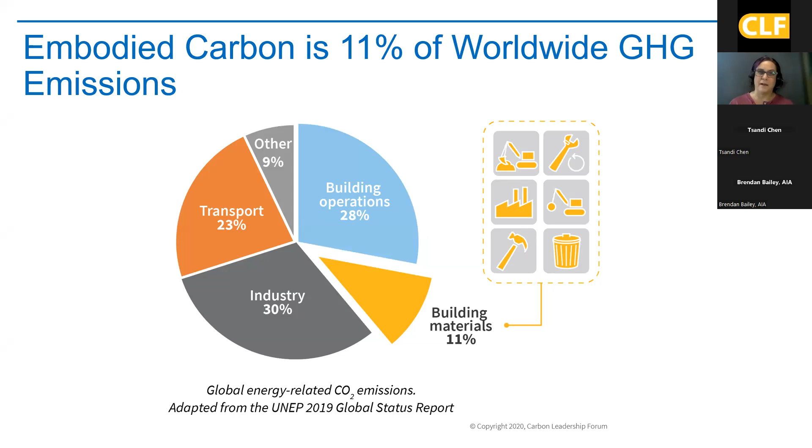For those not familiar with embodied carbon - but being part of the Carbon Leadership Forum in Los Angeles, I imagine you are. This is an important aspect: when we look at the 39% of GHG emissions associated with buildings, 11% of that is associated with embodied carbon. I hope y'all have heard of that before; this isn't the first time you're hearing it.

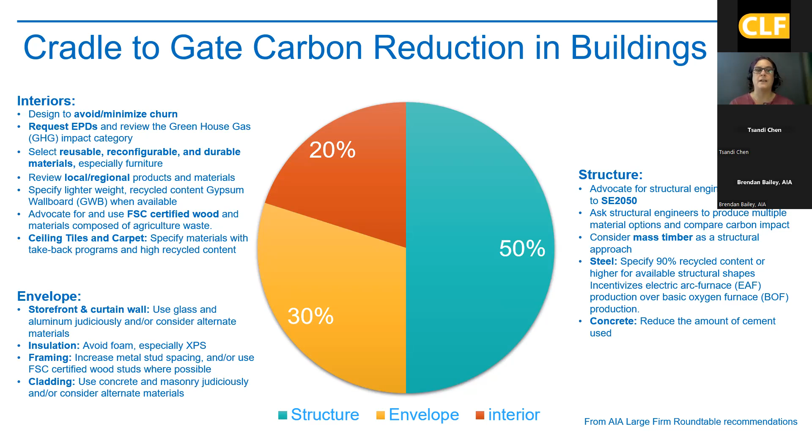Likewise, when we look at the cradle to gate embodied carbon of a building, the majority is associated with the structure. This is a chart from the AIA Large Firm Roundtable breaking down three major components. I like to show this graph because, yes, this is the upfront embodied carbon, but as we look at the life cycle, that 20% for interiors starts to grow over the life of the building. If you're familiar with the book How Buildings Learn, that's the aspect where those products change way more frequently than the envelope or the structure.

As I mentioned, NBI has been working within different policies to advance embodied carbon. We've been working at the state level, building codes, local codes, and utility incentives. Within each of these there are different levers that can be pulled. You've seen Buy Clean procurement policies, different incentives jurisdictions can provide, green building rating systems within the building codes, and REACH codes, stretch codes, and green codes that can incorporate embodied carbon requirements.

There are a lot of different municipal codes - you've heard of Marin County's concrete code, which is a county code. Zoning codes, like what's happening in BC, are also really important. And as utilities start to look not just at kWh and therm savings but at GHG emissions, we're going to see more utility programs finding different ways to address embodied carbon.

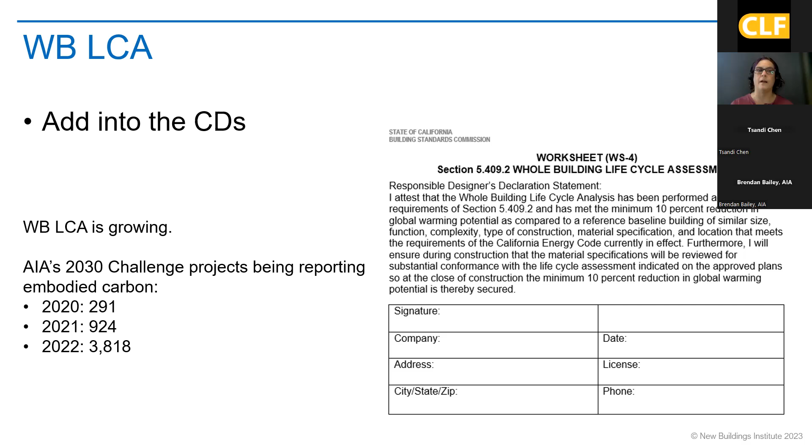The numbers on the far left are AIA's 2030 Challenge and how many projects have been reporting embodied carbon — the growth year over year is pretty drastic. Projects over 100,000 square feet are more likely the firms reporting to the 2030 Challenge, so we're anticipating most of those projects will choose this path. And this will start to get into the worksheets here.

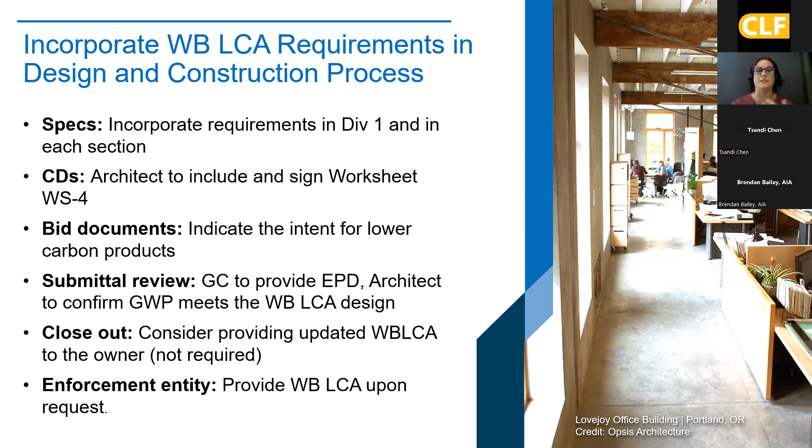There is documentation set up to support that process. We've started thinking through ways to incorporate different components into your requirements, because really only the reporting form is needed. But it's important to put the requirements within the specifications, the CDs, the bid documents, review things through the submittal review process, and understand what was included or not included at closeout. We have some of these in here as recommendations, and we'll continue to build on this through important conversations like this.

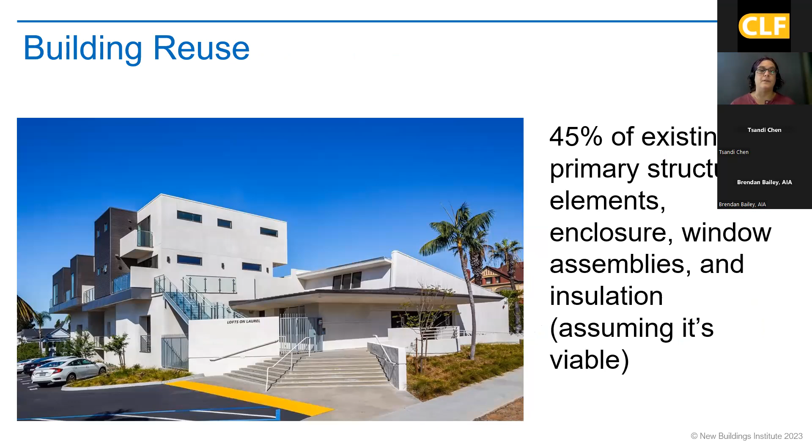For building reuse, 45% of the existing primary structural elements, enclosure, window assemblies, and insulation — assuming all of that is viable — can be counted towards that 45%.

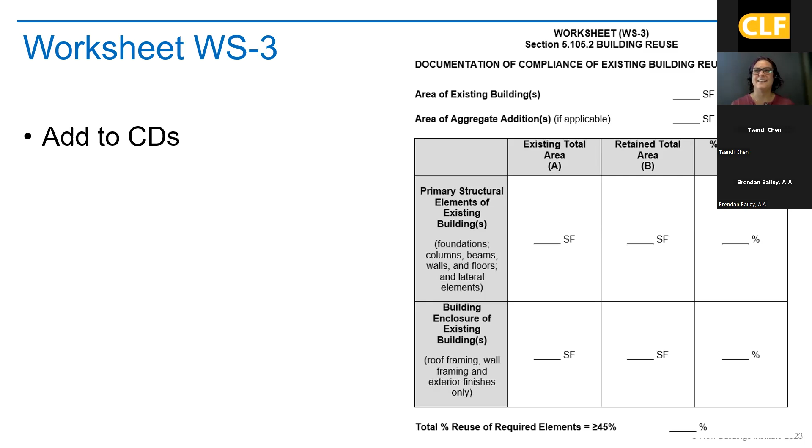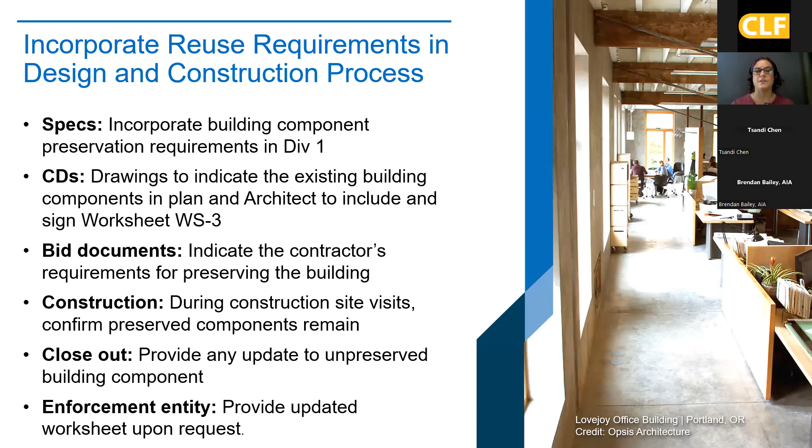If you've worked with CalGreen, you know they love worksheets, and you have to put those in your CDs. This is just the template of what that looks like, with different ways to incorporate it within specifications, drawings, bid documents, how to verify during construction, closeout, and really the state's enforcement is that worksheet.

The prescriptive path, as I mentioned before, is aligned with Buy Clean California plus concrete. One thing we hear frequently is, why are the numbers so high? They're high because when we put this proposal together, we really just wanted to move the industry from voluntary to mandatory.

So there was whole building LCA and reuse already within CalGreen, and we moved those from voluntary to mandatory. We also wanted a prescriptive option, so we brought in what was already included in Buy Clean and added concrete, because we kept hearing from everyone that this was an important element to include. And because this is newer to CalGreen, we wanted to make sure it wasn't taking us too far away from what was already known.

So we get some comments that the GWP values are really high and really easy to achieve, and that is true for the mandatory section if you choose to take this path. As I mentioned before, with projects at this size, we believe many of them will be using the whole building LCA path. The other component is that because we have the tiered structure, jurisdictions are able to adopt tier 1 or tier 2, which would require a lower GWP limit and a higher percentage of whole building LCA reduction.

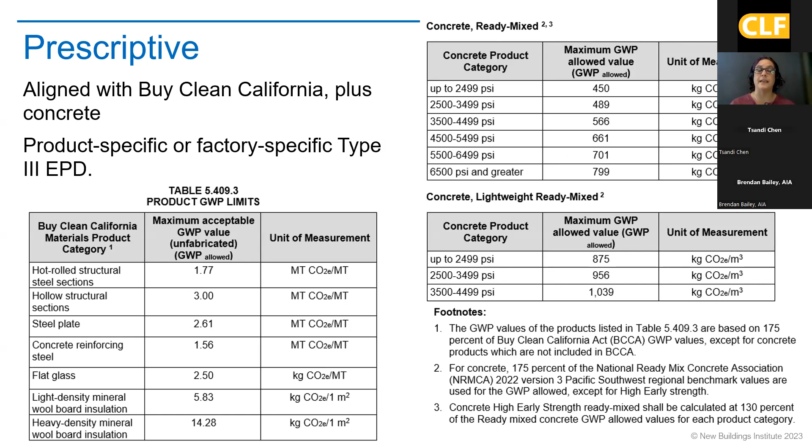One other thing I forgot to mention is that we are allowing product-specific or factory-specific type 3 EPDs at this time. Product-specific is much more where the industry is now, but we want to get to factory-specific in the future, so I imagine that in future code cycles we might see the product-specific option move away.

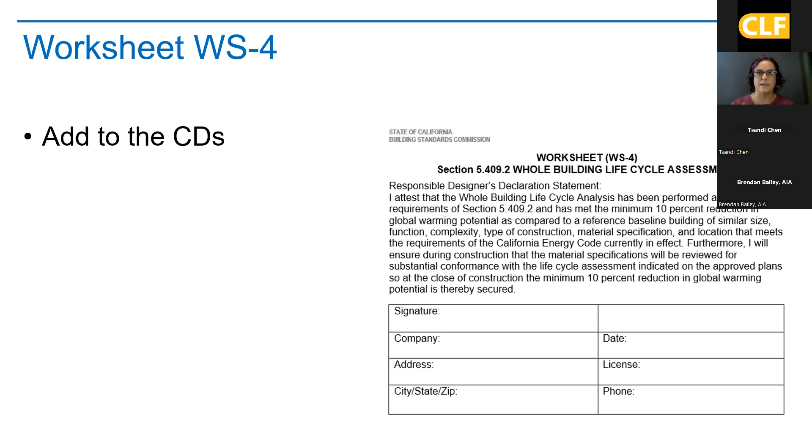So there is a worksheet for this. I think I pulled the wrong worksheet here—this is for whole building LCA. Similar to the other ones, we did provide some guidelines on how you can incorporate the requirements into the specifications, into the other contract documents, and verify at the end of the project.

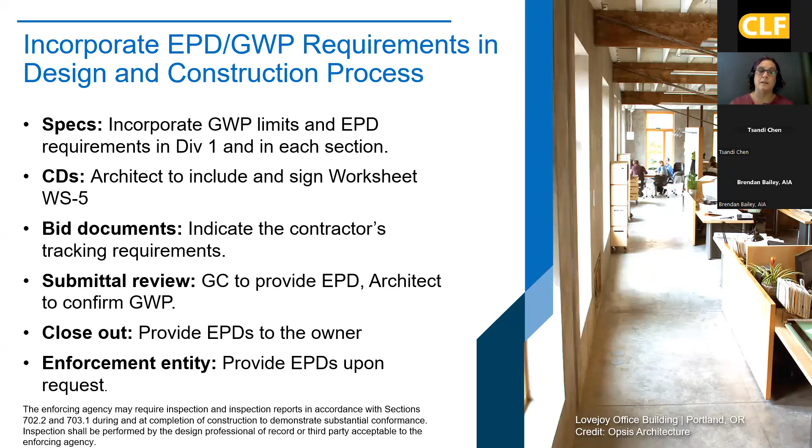There is a note at the bottom that says the enforcing agency may require inspection and inspection reports, in accordance with the sections listed, during and at completion of construction to demonstrate substantial conformance. This is in there as a way to allow special review at the end of the project, and that was at the guidance of the building inspectors, to make sure there was an extra layer of verification if there was any question.

So we received a couple of questions in advance. One of those was—actually, let me just pause for a second. Luke, I'm not giving you a chance to jump in. Is there anything in the chat we need to address right away? There's a question about baseline setting, which I think Anish is going to tackle. And then there's a question asking if structural concrete and envelope concrete fall under the same category.

So it is just ready mix concrete. What do you mean by envelope concrete, I guess would be my question. I think that if it was like a precast facade—yeah, so precast is under a different product category rule, so it would be excluded. That's good clarification.

So one of the questions—go ahead, Luke. Sorry, I think there's one other question: agreeing that embodied carbon limits for concrete are high, why 175% and not something lower?

So that was because that was the way to get this into CalGreen. With the other components, reuse and whole building LCA, those are already in there as voluntary, so it was kind of easy to slide them into the mandatory slot. With the prescriptive approach, we aligned with what was happening with Buy Clean, and because of that we needed to align it with the percentage of where reuse and whole building LCA were. So that's where we ended up with that 175%.

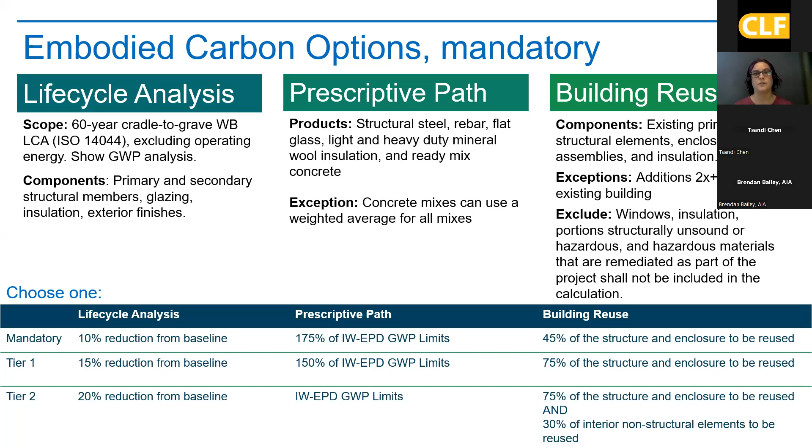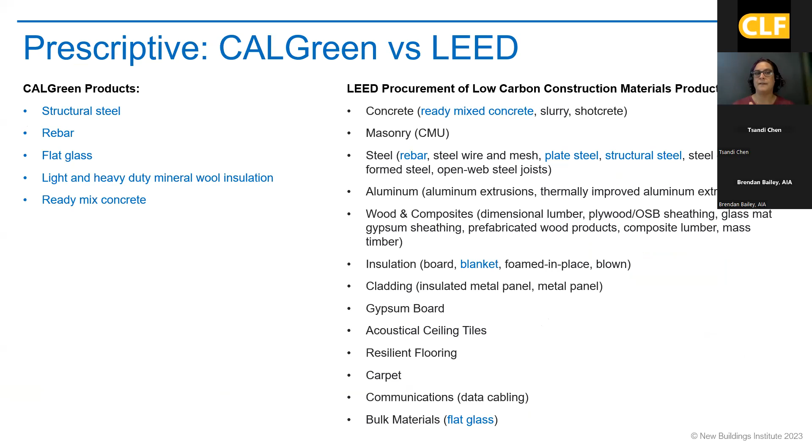So there's a question about how CalGreen is different from LEED. I pulled the LEED procurement of low carbon construction material products, and you can see how this short list of CalGreen products, which is the same as Buy Clean except for that ready mix one at the bottom, aligns with what is required for LEED.

The LEED versus CalGreen requirements - for CalGreen, you're just providing EPDs and meeting a specific GWP target based on the products that were installed. For LEED, you're also providing EPDs based on the products installed, but you're also doing this calculation that looks at the quantity of the product being installed in the project and making sure the difference between the baseline and the actual product is a specific percentage reduction in range.

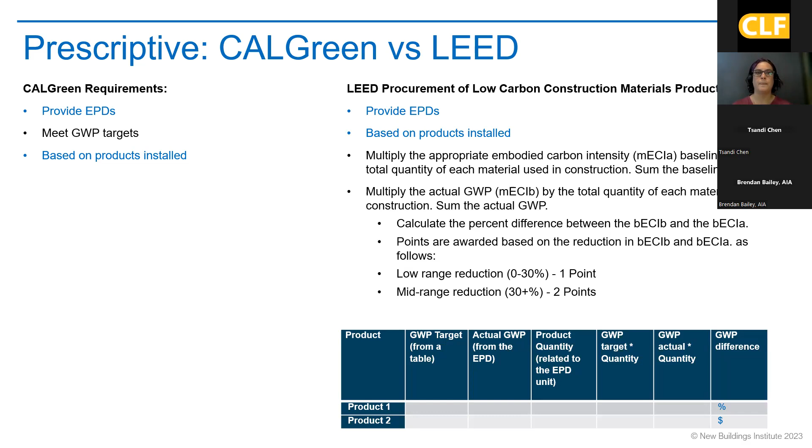And then the other question is, what happens if you don't have an EPD? Well, with CalGreen, you don't really comply - it is required, there's no alternative path there. Within LEED, they say just try to find one; if you can't, then you can use the industry-wide EPD. But because CalGreen was based upon meeting a specific GWP limit that was higher than the industry-wide average, it didn't work out to allow that. So a team would either have to comply with one of the other two embodied carbon paths.

So I'm going to leave it there because I'm sure there are way more questions for Anish as we get into whole building LCA. There are some resources up here - you can see the link down at the bottom, and I can throw that in the chat as well if anybody is interested in NBI's resources on embodied carbon.

Webley, there's one more prescriptive path question. It asked: when the prescriptive path starts to go from the product level to the facility level, will an analysis of transportation of lower embodied carbon product from a further distance be considered? Potentially - we are not drafting that next version yet. If it seems like the data is available to the market, or is just about available to the market, that's definitely something we want to look at and consider.

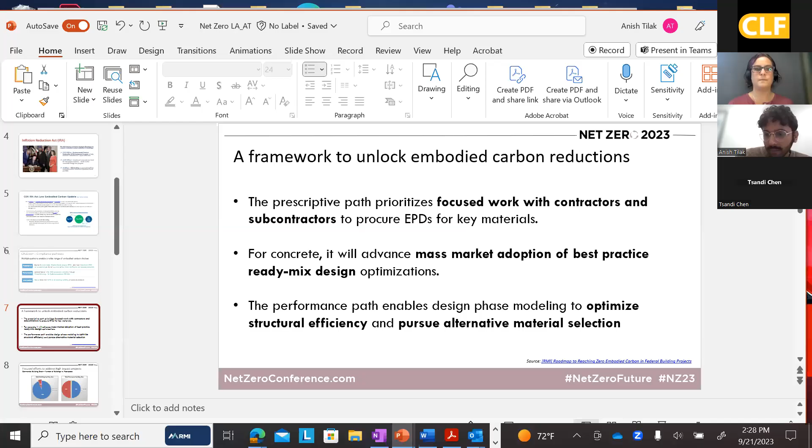Webley already went through this, but I wanted to start by highlighting what's happening at the federal level, because you all are leaders in this space on the topic of embodied carbon. The intent of the CalGreen requirements is to set a floor for all projects, but we don't want to stifle innovation. As you're working on projects, you've already said in the chat the standards aren't as ambitious as you'd like to see. Definitely push your projects as hard as you can, because there's a lot happening at the federal level in terms of incentives to create demand for low carbon building materials with really low GWP.

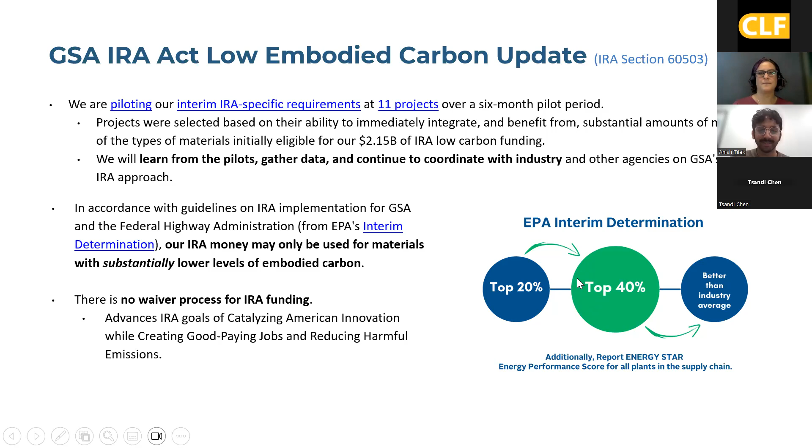But digging into CalGreen in more specific detail, there are three different pathways that Webley has outlined really well, and I really wanted to focus on the whole building lifecycle assessment pathway to provide clarifications and read through the language with you all - because I know one of the challenges and some of the pushback we've heard associated with whole building LCA is that baselining is relative, so it's very difficult to set standards and rules for what's in the baseline. We've tried to do that explicitly in the code language.

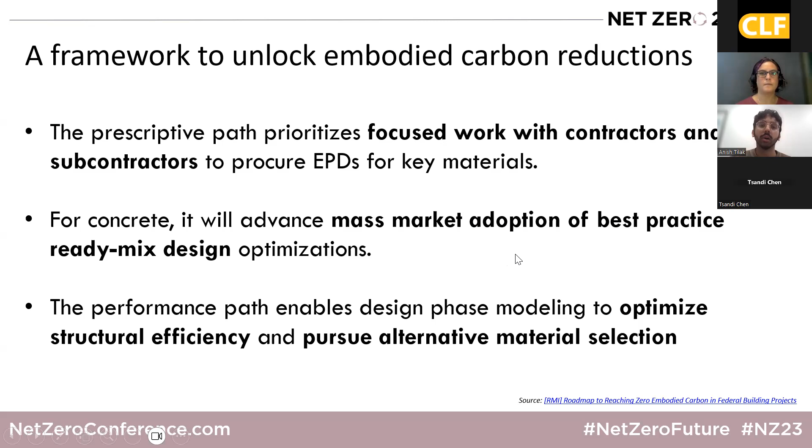However, we think there's an opportunity in the guidelines the state will put out to really refine this and have a strong set of criteria for what should be modeled for the baseline. This group is the perfect group to get that information from, so after I present, we'll want to do more of a discussion to hear what you'd like to see in those guidelines.

Going into the language itself, I've highlighted here what the description of the baseline building is. First of all, the whole building LCA covers each life cycle stage from cradle to grave, excluding operating energy. That's fairly typical, but it's an important distinction to make.

If we're talking about the baseline, the way we're defining it is a baseline building of similar size, function, complexity, type of construction, material specification, and location, and that it meets the energy code. So it really provides guardrails for project teams to not include an unrealistic building type as the baseline.

That's the first level of information to define the baseline. Then there's some information about reference standards and qualifying software that can be used to conduct that whole building LCA. In the notes, there's guidance on recommended software—the typical ones you're all familiar with for doing whole building LCA: Athena, OneClick, Tally.

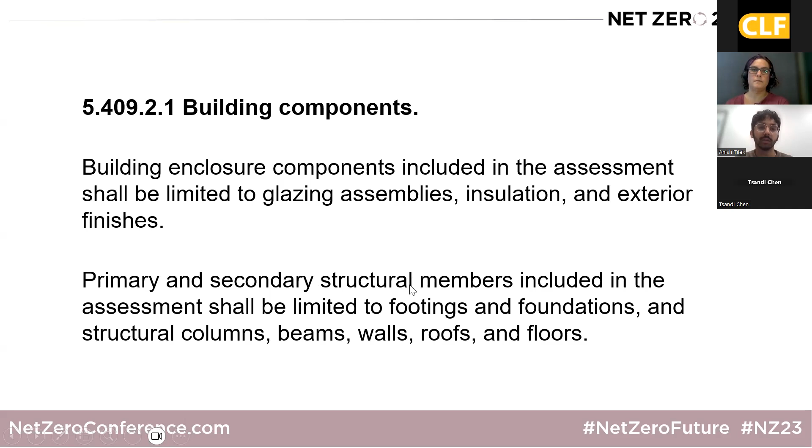There are optional scope items. For example, if you're doing a whole building LCA for a client and including additional things, that data is still useful to provide. You can input it there, but it wouldn't be counted as your percent reduction for meeting the code requirement.

This template is modeled after the CLF intake form they've been using to gather whole building LCAs from design firms, so it should look fairly familiar. We're going to be working with CLF to host a site where you could submit this data, so CLF can in the future start to benchmark this information.

I'll pause there, and I'm sure there's open the chat, let's look at any questions. So there's one question, Anish.

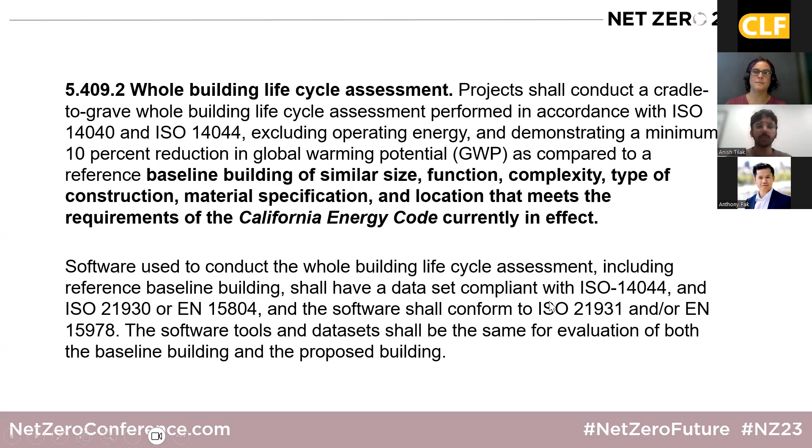I think that is all the questions. If I missed any, speak now, raise your hand, or we keep rolling.

Sounds good. One point about folks choosing the whole building LCA path: you all are likely aware of Assembly Bill 2446, which basically gives authority to CARB, the Air Resources Board for the state, to start to benchmark embodied carbon for buildings. One of the goals of CalGreen and this requirement is that the data feeding up from this requirement can help inform CARB's benchmarks going forward. So I think that's one of the reasons we also see whole building LCA as a pathway that firms will choose to take.

Can I ask a question on that, Anish? Because there are other benchmarking efforts going on, like with the Carbon Leadership Forum - do you see anything like that influencing future code, like performance limits? Definitely. I think we're in the stage of a lot of these studies happening, and once they're completed - I know CLF has a California-specific benchmarking study they're going to release results for - but we need very solid footing to stand on before we can set that absolute benchmark.

But hopefully in the next code cycle, that would be something we could do.

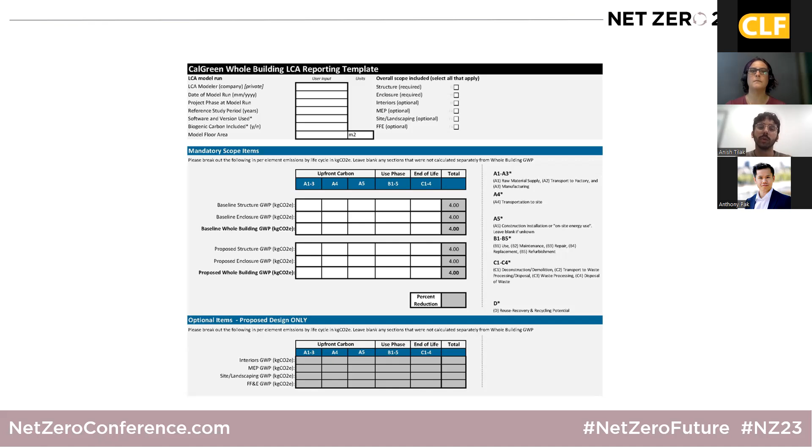I know we're running short on time, so I'm going to roll through the building reuse credit. I just wanted to make sure folks understand how the calculation is done. This is an incentive, or exemption, if you're doing an adaptive reuse project or an addition, but preserving an existing building and maintaining 45% of envelope and structure, you can do a more simplistic calculation and comply with the embodied carbon requirement in CalGreen.

This provides detail on what's included. Again, it matches the whole building LCA in terms of covered scopes. I'll say that window assemblies and insulation will not be included in the calculation. Reason being, we want people to improve the energy performance of those existing buildings, so those elements are specifically excluded. That's the one primary difference you'll see.

Happy to answer any questions on that. In terms of the calculation, it's done similar to a LEED credit that's similar to this one. You're going to calculate the floor area that you had in the existing building before, what's being retained, and you get a percentage. Same thing for the different enclosure components. Then, when you total it out for the whole project, you're not going to just add the percentages and divide by 2.

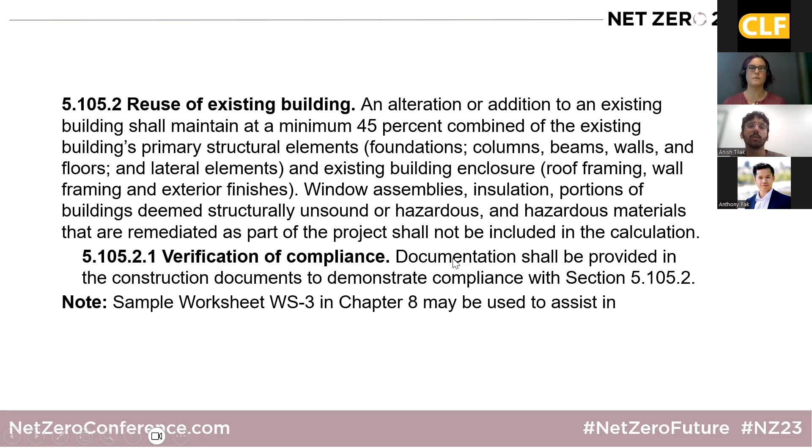You see here at the bottom of this table that there's also interior non-structural elements included. The language I've shown here is for the mandatory provision, but in the tiers there are higher levels of performance that are set. For the reuse credit or measure, the interior non-structural elements component is associated with the tier 2 compliance pathway. That's where that fits in.

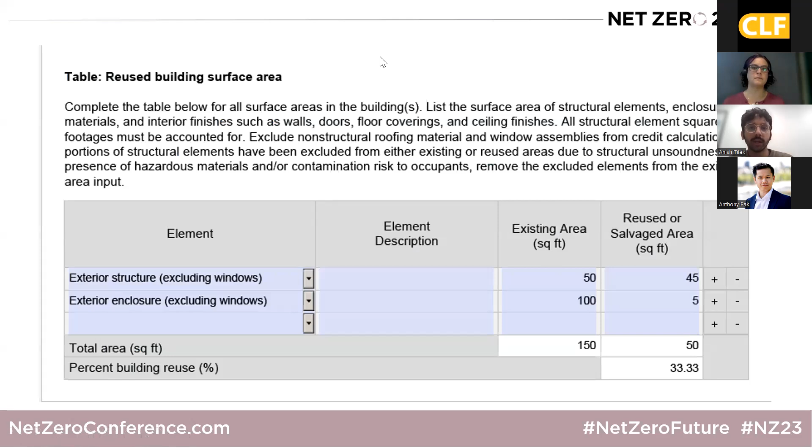Here's just a demo, it's from the LEED form. So if you've done this credit before, you're probably familiar with it. But yeah, that's the reuse pathway. If there's any questions on that, happy to answer, and I'll stop sharing as well.

So there's one question, but I think it's not on the reuse bit, unless Abby, correct me if I'm wrong. Abby is asking about gypsum wallboard being included in the building components. That's not specific to reuse, is it, Abby, or is that referencing the LCA? No, it was the building components, 5.409.2.1. Sorry, it was a little further back. I was just making sure I understood it. Sorry to jump around. Yes.

The interior gypsum board is currently not included in the building components. It's glazing assemblies, insulation, and exterior finishes. In the tiers, I think there's additional guidance for interior finishes if you're including them, and we'll provide that. But in the base language, the gyp board would not be included.

Okay, thank you. And one other question, back to whole building LCA: in talking about the baselining and using product specific EPDs, what implication does that have for tools like Tally that don't have those product specific EPDs? That's a good question. Are you saying that you're not able to substitute a GWP value in Tally, so if you have a product specific EPD, you can't manually replace the GWP value? You cannot manually replace it, correct?